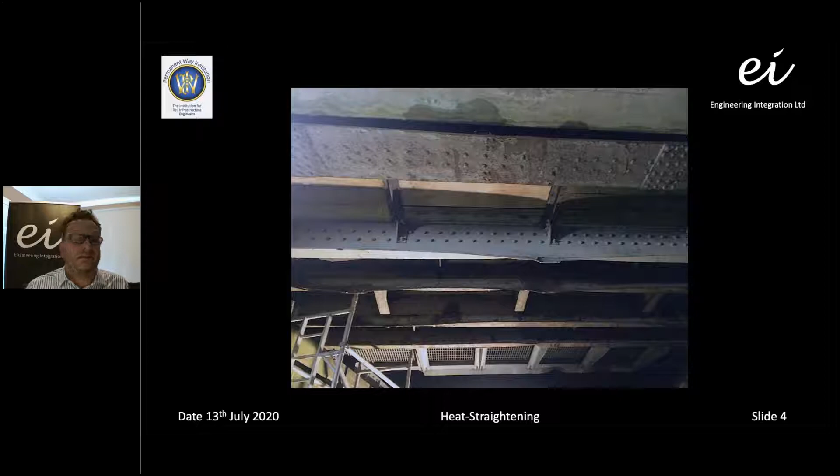When we look into a little bit more detail, you can see there that we've actually got significant deformation of the bottom flanges. We believe that this structure was struck by a container being carried on the back of a lorry, and the container impact points are actually quite well defined on the structure, and you can see there that the bottom flange has rotated significantly. We'll come back to that particular structure in a little while, but I just wanted to give you an insight into the type of damage that we're actually dealing with.

So the advantages of heat straightening are that it's most advantageous for realigning the main elements of the structure, so the main structural girders. It can be done in situ. There's no structural propping required to actually support the structure whilst we're undertaking the heat straightening, because we retain the majority of the permissible stress in the main girders whilst we're actually undertaking the heating.

There's a very low number of operatives required during a heat straightening process. We would generally take 4 crew to site with a supervisor. Typical duration of the project would be 2 to 3 shifts, depending on how many heat cycles would be required. When we're undertaking the works, if there are 2 damaged girders, we can alternate between the girders that we're heating - we heat one, allow it to cool, and then we heat the next. So that makes us very efficient when we're actually working on site.

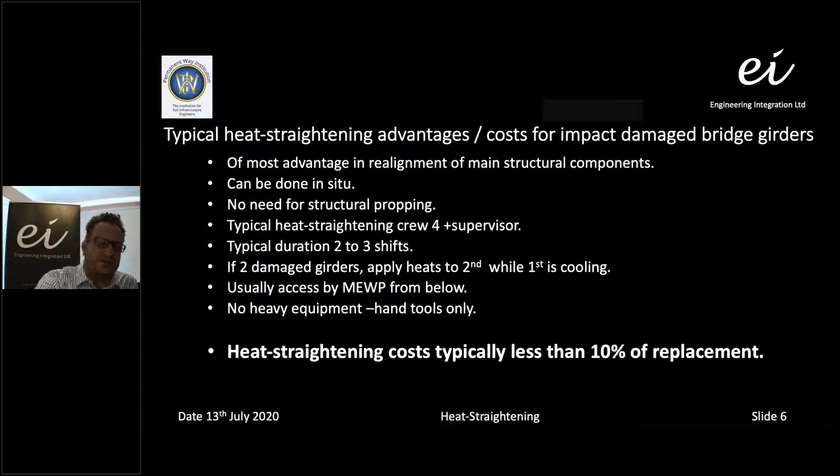So the principle of heat straightening is based on partially constraining the material during heating and then allowing it to cool unrestrained. And as it cools, it obviously contracts and therefore shrinks. So if you consider heat straightening in the context of heat shrinking, that's probably an easier principle to understand.

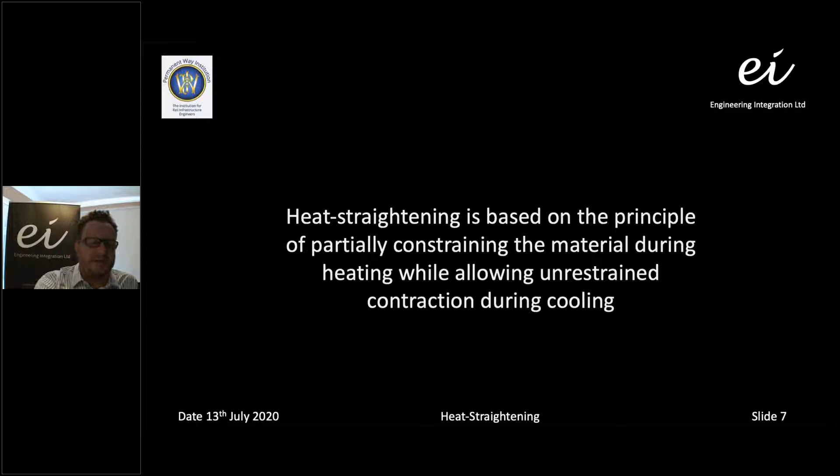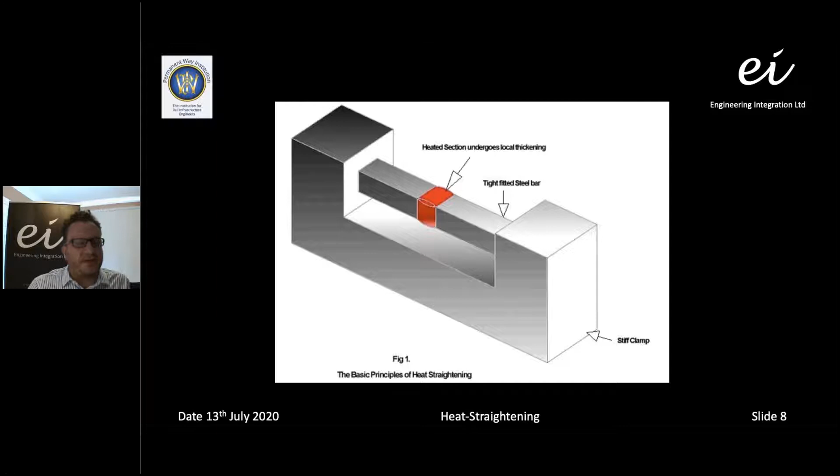This is probably the most obvious way of describing how heat straightening works. There's a test piece in the middle of the diagram, and then there's a forged anvil, a clamp that sits around the test piece. When we heat the test piece, it can only expand in two directions, the X and Y directions. As it heats up, it tries to expand, but it can't expand longitudinally. Therefore, as we allow the element to cool, it's able to cool in all three directions, so the steelwork effectively shrinks in the Z direction. That's principally how we undertake heat straightening and the principles behind it.

This is a typical diagram showing the reduction in permissible stress based on temperature. We don't want to heat the structure too far, because we reduce the permissible stress significantly. Our target temperature, our critical temperature, is around 650 degrees C. At that temperature, we're looking at a reduction in permissible stress or yield stress of around 60%, if the whole section was heated up simultaneously.

But we're actually applying heat to a very localized point, so we're not heating the whole cross section of the steel girder simultaneously. We're just doing it at very discrete heat patterns, so that's limited. The permissible stress is actually a lot higher than what's taken from that chart, so it's the average temperature of the section that we're actually looking at.

We limit the critical temperature to 650 degrees C, because if we go above that, the crystalline structure of the steel starts to change, from body-centered crystalline structure to face-centered crystalline structure. That moves the carbon content around within the steelwork. If you then subsequently allow that steel to cool very quickly, some of that carbon can get trapped and become brittle, with crystalline carbon concentrations in certain areas that cause the steelwork to become brittle. So we want to avoid that.

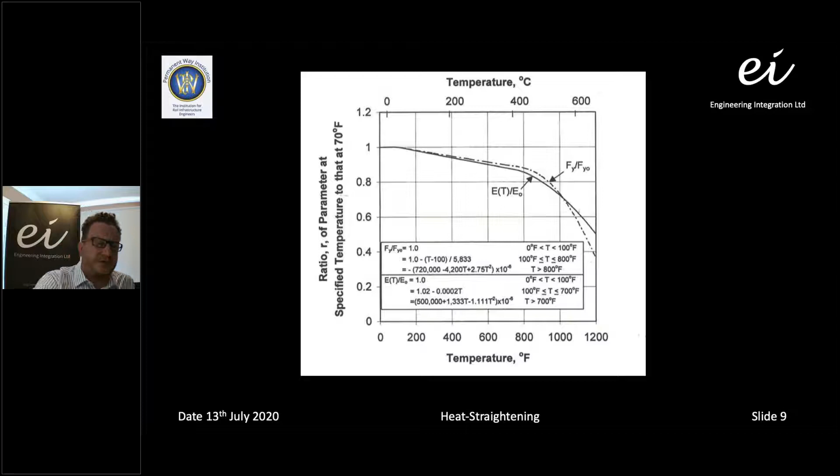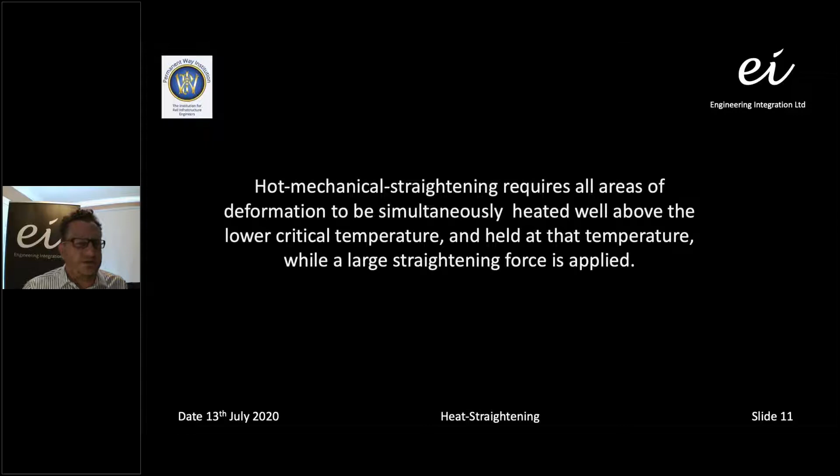Heat straightening is very different to hot mechanical straightening. Hot mechanical straightening is where you heat the whole structure up until it's red hot, and then apply force to the structure to actually bend and push it back into shape. We don't do that with heat straightening.

This is a typical example of a highways bridge that was hit by a low loader carrying an excavator. The impact point there is quite obvious in the image, and the excavator arm struck the bridge and, as you can see, has displaced the bottom flange of the girder and distorted the web. Obviously, this is affecting the load carrying characteristics of that structure.

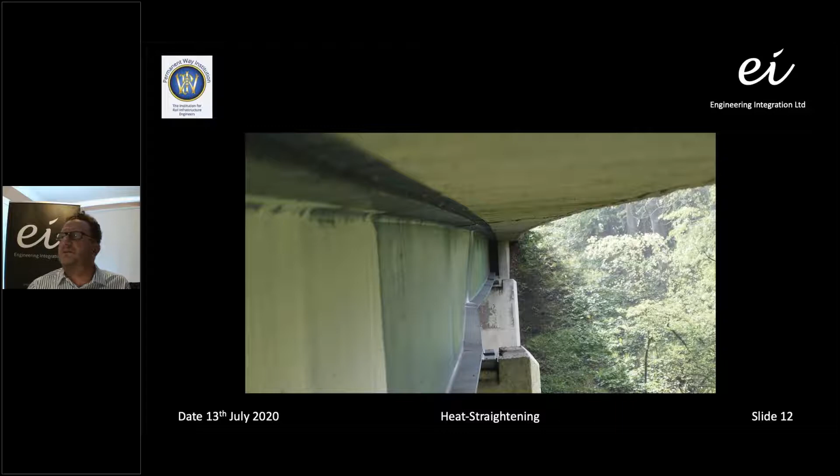Looking in plan on the bottom flange, you can see the deflected shape, exaggerated deflected shape. There's been an impact which has caused a lateral deformation of the bottom flange in the order of 110 millimeters. Therefore, we have elastic deformation and plastic deformation occurring.

The plastic deformation is the area where we want to apply heat and shrink the steelwork so we can restore the structure back to its original shape. That's where we want to provide the shortening, because that has gone beyond the elastic deformation and won't return to its original shape just by releasing the forces and so on.

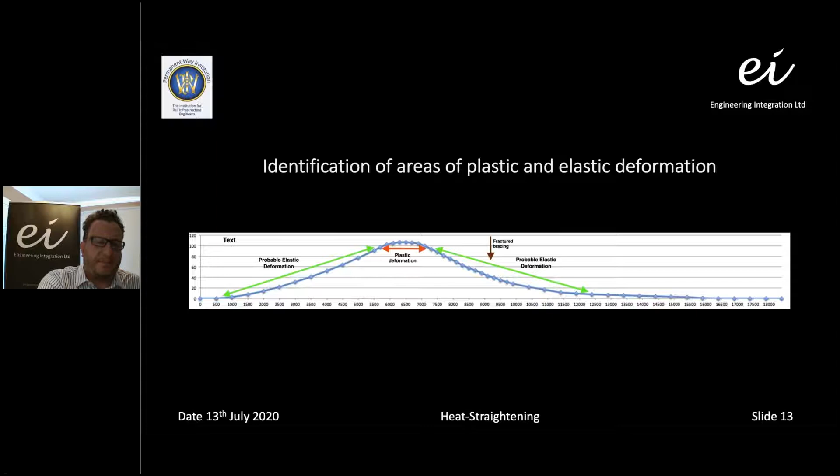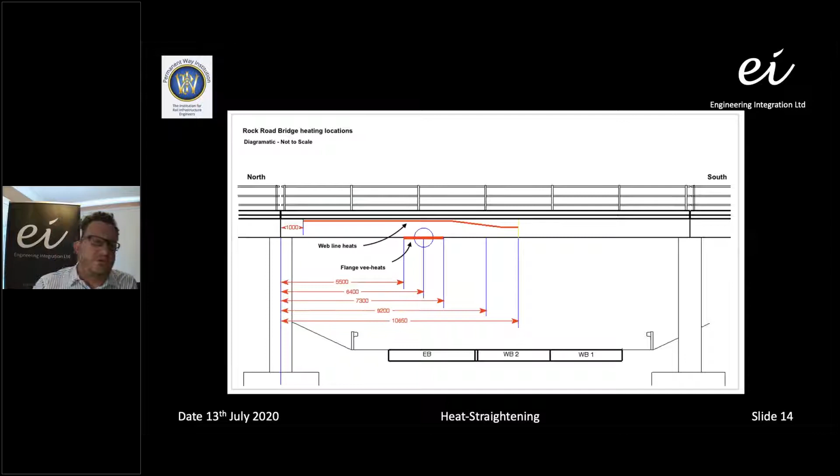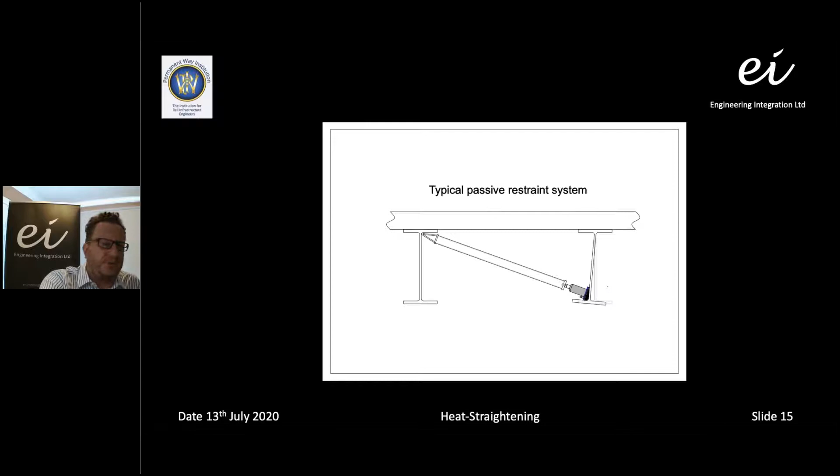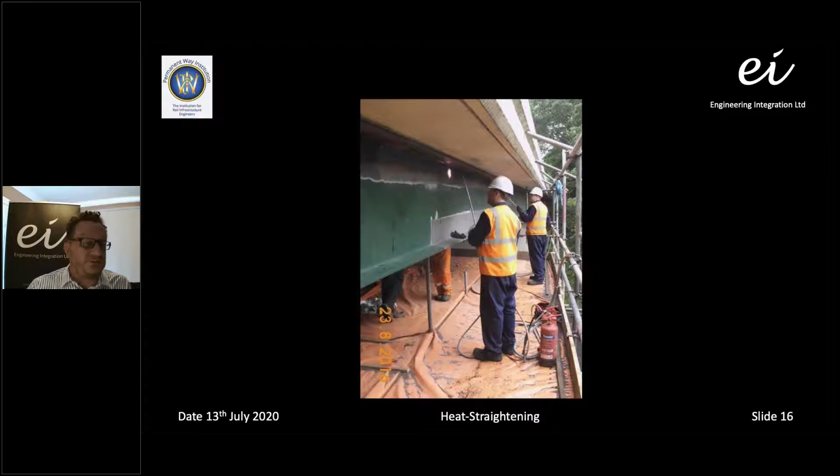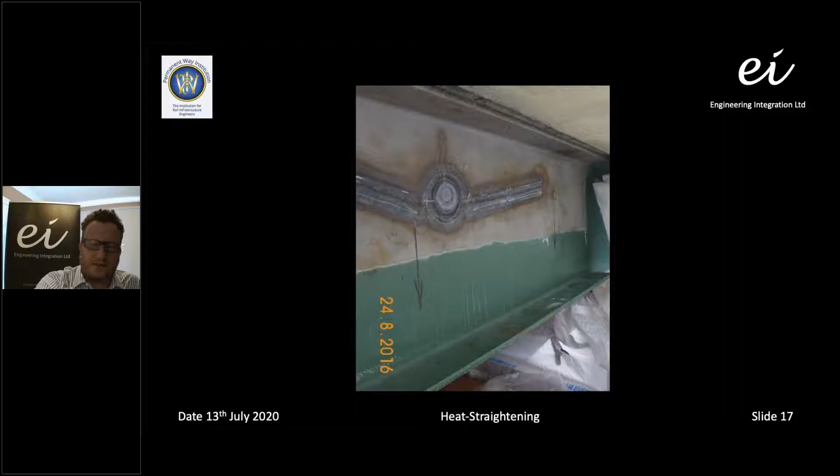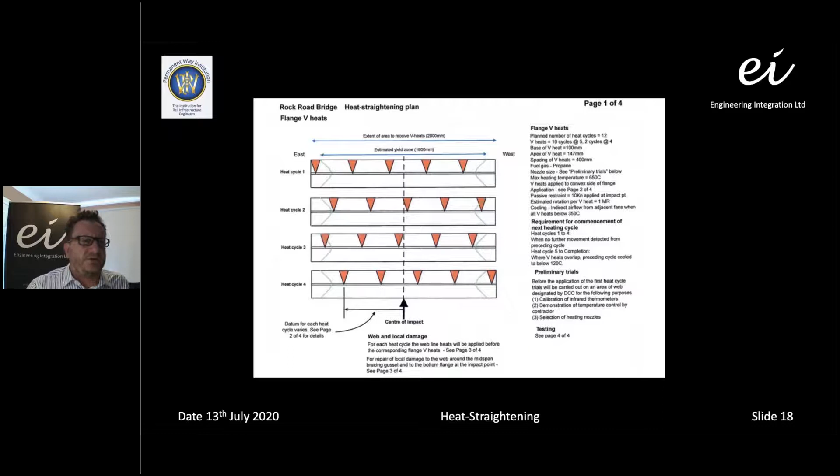That's typically what we would do when you've got deformation of this type.

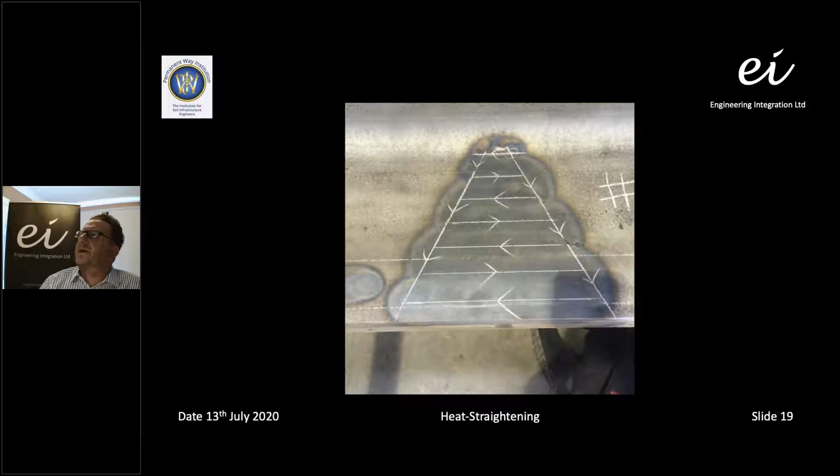It's very key that we look at that and see the heating patterns, because that's what we use for controlling the temperature. We can't use thermometers because the process and the change in temperature is very quick, so we use heat patterns to identify the amount of heat we've put into the girder.

During trials we take a test piece with similar material properties and thickness to the girder we're going to be straightening, and undertake heating trials on each element.

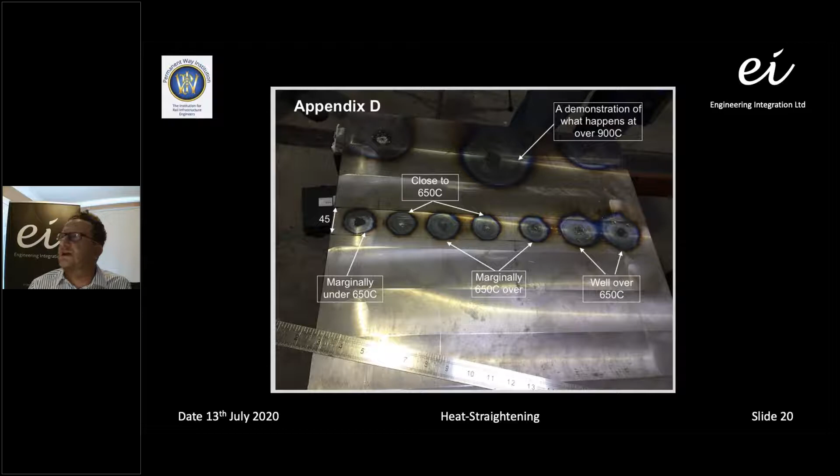We use heating crayons to define the actual temperature on the test panel, but we don't use heating crayons extensively when undertaking the works on site. We utilize the heating patterns that are actually shown on the steelwork.

When you actually apply the first heating trials, you've got a lot of elastic response in the girder that's helping you. So as soon as you start to shrink the steel in the plastic zone, the elastic elements of the steel start to force the girder back into its original alignment. And then that elastic force reduces as you apply more heating patterns.

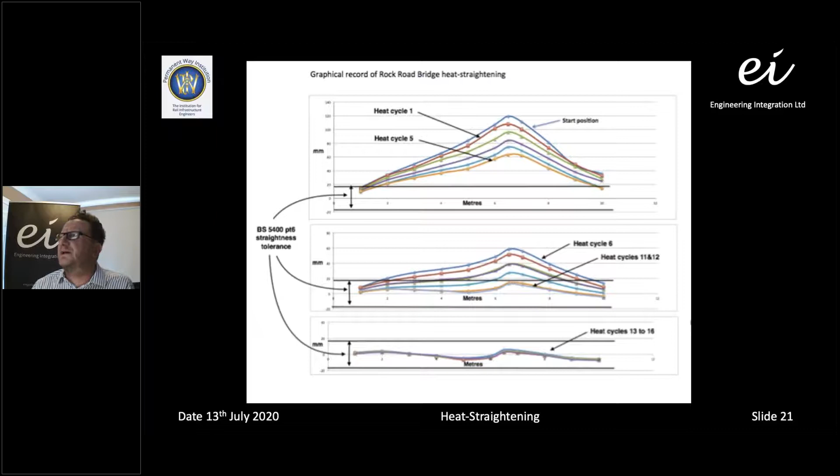We have a target to hit to do with straightness tolerance. That is defined in BS 5400 Part 6. Basically, we apply heat until we get within those parameters, and that's theoretically what the steel would have been manufactured to when it was originally fabricated. So that's the target that we're actually looking for.

However, it's likely that we'll be able to use a process of overplating or cutting out sections and butt welding in new sections of steelwork, and then using heat straightening to correct the alignment of the web, for example.

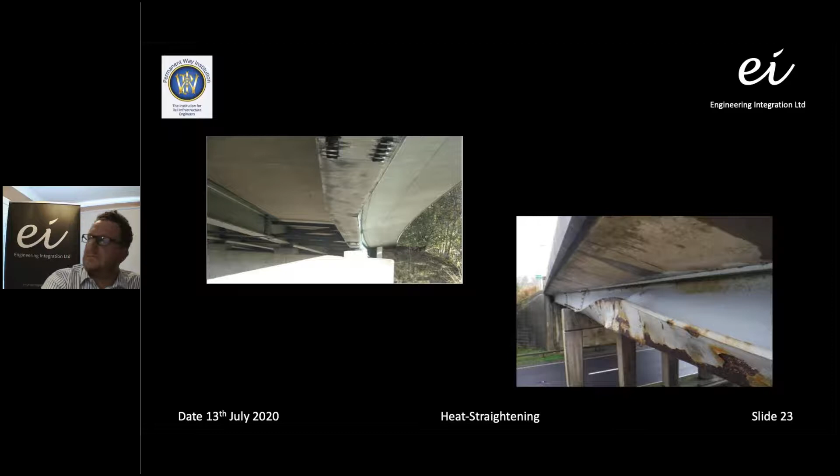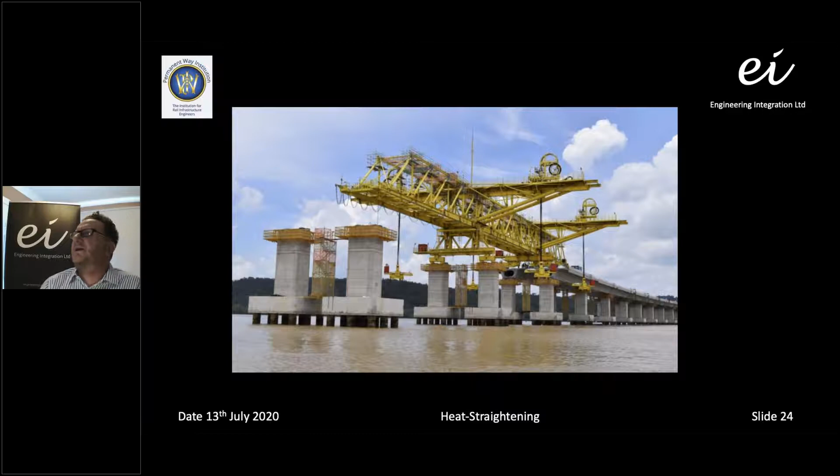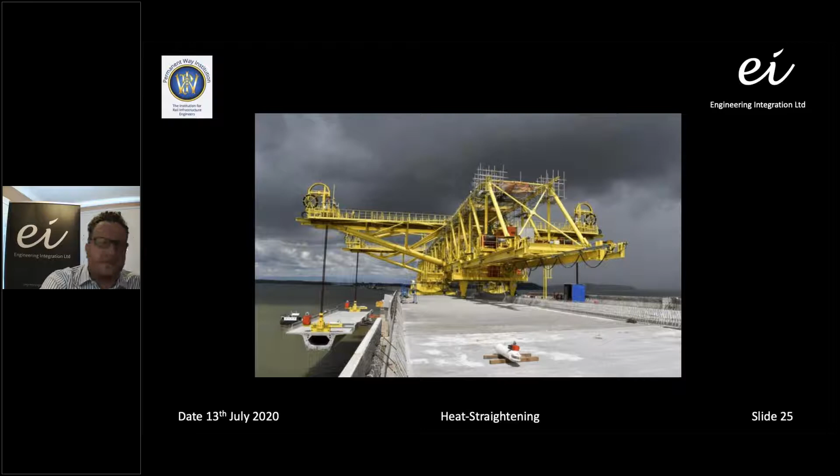We were unaware at the time, but the structure that was being built in Brunei was actually 19 kilometers long, and they were on span 6 when they bent the temporary works. So they were very relieved that we were able to find a solution for them.

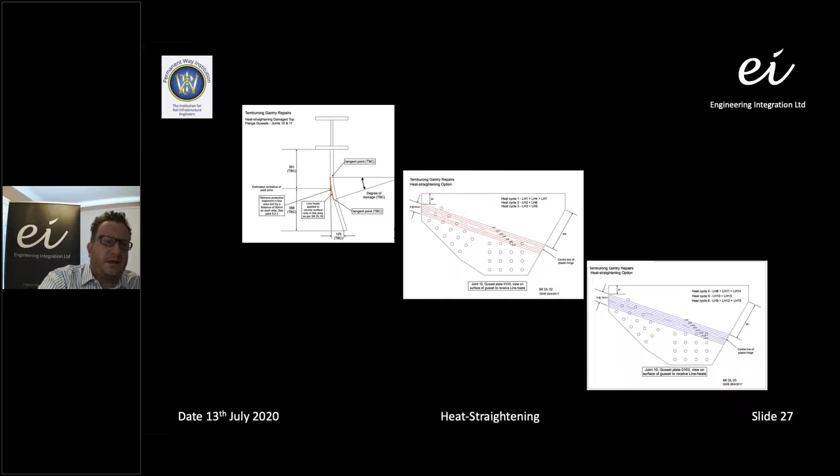And obviously that's what we would be looking to restore the shape of using heat straightening.

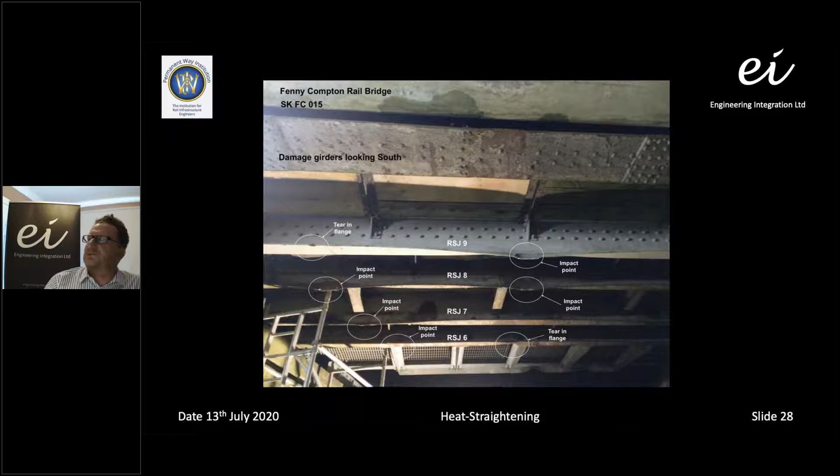Other aspects we'd need to look for during inspections would be tears in the bottom flange, and also brittle fractures where the impact has caused a fracture. We need to be aware of those, because applying heat could exacerbate the problem. So we'd probably have to cut the brittle fracture out and plate it before starting any heat straightening. We're very conscious of brittle fractures occurring in the steelwork around the impact point or remote from it.

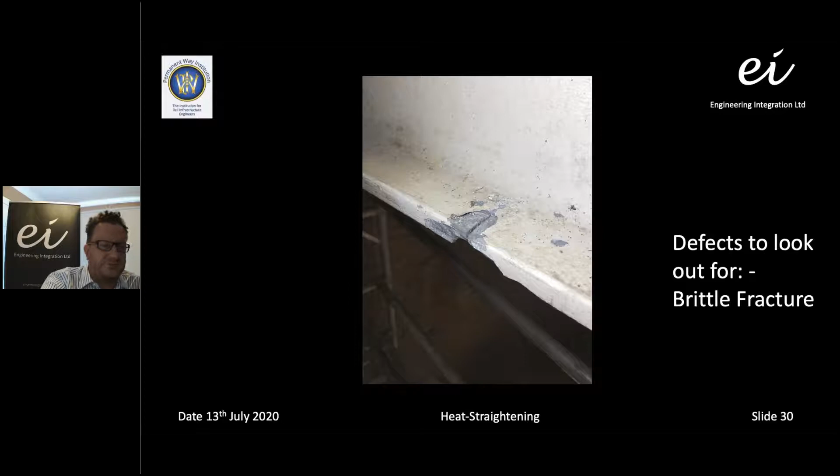In the UK we're limited to allowing a strain ratio of 50. Anything above 50, the Highways Agency at the moment won't allow us to heat straighten above that point. So we're limited to an upper strain ratio of 50. In the United States, they've allowed contractors to take the strain ratio beyond 50, working with strain ratios up above 150, so they're pushing the boundaries far more than we are in the UK.

So we're taking quite a conservative approach at the moment, but we hope to do more trials to understand whether we can take strain ratios beyond 50, or deal with structures that have strain ratios beyond 50 within the UK, and demonstrate that through research and development.

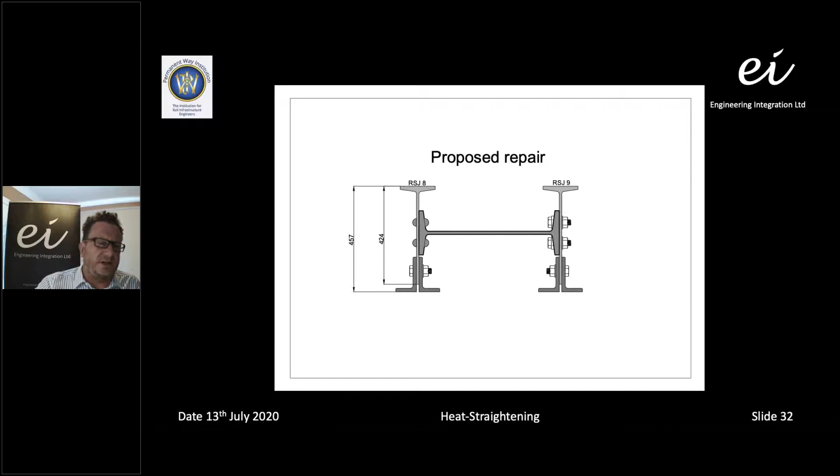That would be the typical repair we'd be looking for on this type of girder. Because of the extreme strain ratios shown in the earlier slide, we would cut the bottom flange off effectively, then replace that with back-to-back angles, and use heat straightening to straighten the web. So it'd be a combination of techniques to deliver the remediation.

We also offer training opportunities, and several courses to allow people to understand heat straightening more thoroughly. We offer a design appreciation course, a bridge inspection course for bridge examiners to understand whether heat straightening is appropriate, and also a course for inspection and surveying of structures.

So engineers can go out and actually survey the structure and pick up the salient information we need to allow us to design a heating procedure to do any remediation works, etc.

The courses are conducted on Microsoft Teams and vary in length to suit the course content, but typically we'd have probably 5 individual sessions of approximately 2 hours each. That's the sort of training we do to support the development and understanding of heat straightening.

That's me done. Hopefully it was very interesting for you, and I'm open to take any questions that anybody has. So thank you very much for listening, and I look forward to your questions.

Right, thank you very much, Julian. That was absolutely fascinating.

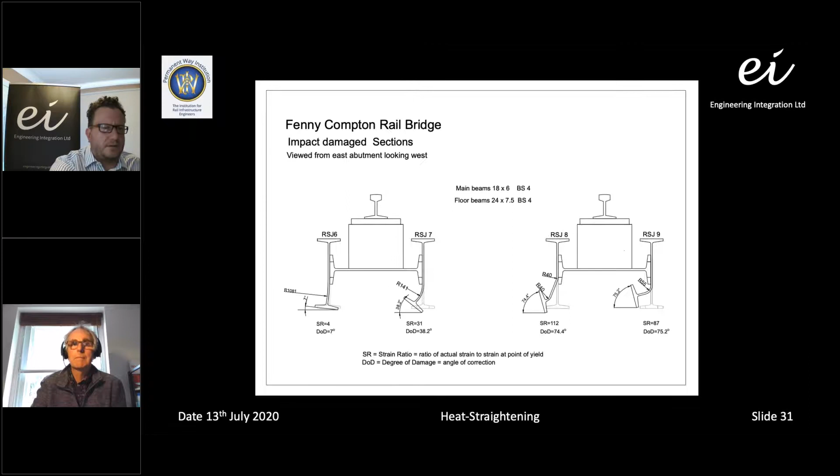So if we've got a crayon that's defined to have a 650 degree category, we apply the stick to the center of the heating pattern, and if it melts, it's above 650 degrees C. If it's lower than that, it's obviously below.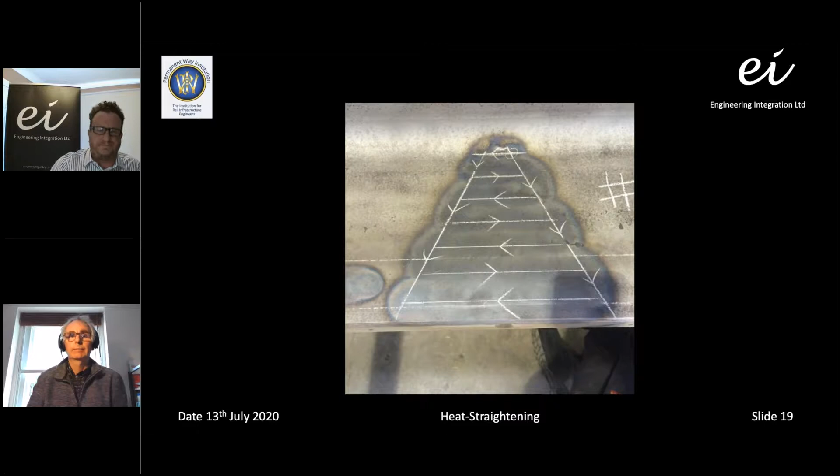To what extent is heat straightening being adopted by Network Rail, or is it just Highways England in the UK so far?

We've done about 30 structures, or 30 structures have been undertaken. We've probably undertaken about three quarters of those within the UK, and they've been predominantly highway structures. Network Rail hasn't quite bought into this process yet, and we're very keen for Network Rail to adopt it, because we see significant changes or significant savings that can be justified by this type of process.

Obviously, railway structures are significantly different in design, and we have undertaken a site survey at Limpley Stoke on a bridge that has been struck, and we've identified that we can't rectify the damage completely by heat straightening, because of certain elements of restraint and tears within the bottom flanges, etc. So we've recommended there are some cutouts required for that particular structure, and we can replace elements and straighten those, then use heat straightening as a secondary activity. Also, the structure is quite old, probably built in the early 1900s, and there's a significant amount of corrosion. Obviously, we can't rectify corrosion section loss with heat straightening, unfortunately.